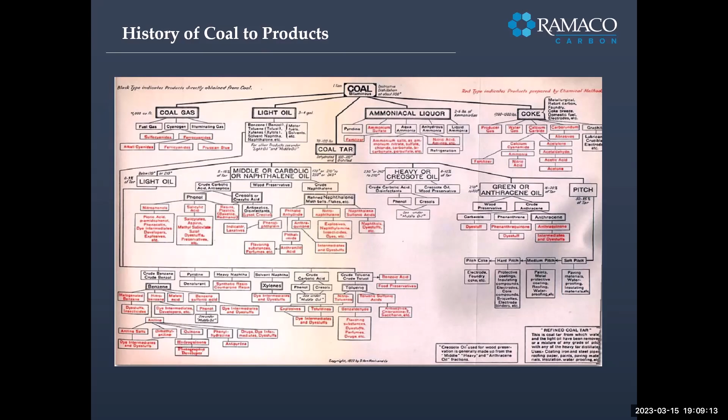The interesting thing about the different oils and gases and diesels is Sasol in South Africa basically did this for 50 years. They were going to build a plant in the southern part of the US. I don't think that ever got built. And this is the way in World War II that Nazi Germany was able to survive without having a whole lot of petroleum. They used the two different methods to generate aviation gas, motor gas, diesel and lubricants.

So our product areas are carbon fiber, bulk graphene, porous carbons, building products, monolayer graphene, and rare earth elements. Carbon fiber, of course, the whole goal here with carbon fiber is to make a lower cost, better product than what you can get from oil. So a lot of these products will come from oil. Plastics come from oil. You can make plastics from coal.

So the PAN fiber from oil is about $10 a pound. Is that still right, Bob? Is that $10 a pound now? So we're trying to shoot for a $5 a pound product. We're trying to make it a structural composite, so we can build things like car shells, hoods for cars, aircraft material, and then there's some applications in infrastructure like repairing bridges and making items for bridges to make them better.

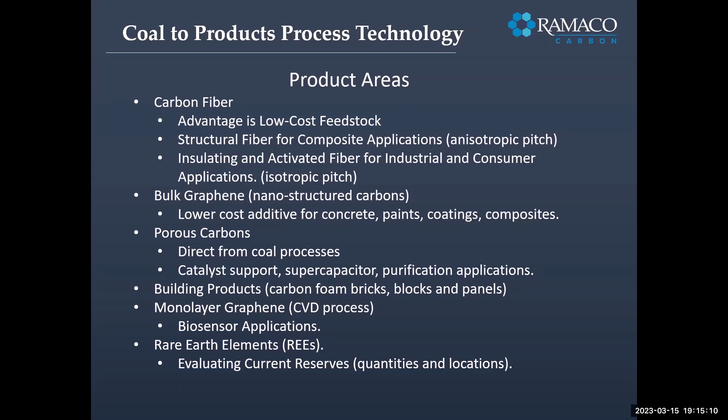So like I've been talking about, we want to take raw coal, very inexpensive, 3 cents a kilogram. A kilogram is about 2.2 pounds. Make it into metallurgical coal, so we increase the value of it by about 5-fold. Here with coke to make steel, we've increased it by about 8-fold.

Coal tar, we're going up in price, and so from the coal tar, now we make pitches, and that price increases even more. And then we go to mesophasic pitch, so high graphitic quality, a mesophasic pitch, and by graphitic quality, I mean the graphene occurs in it. We have ways of measuring the graphene and visualizing it.

And the textile process to go from the coal pitch or the coal tar to the carbon fiber, you'd basically melt this and make a thread. But once you get that thread made, then you treat it, so you have to oxygenate it and carbonize it to make it hard, so you can actually use it.

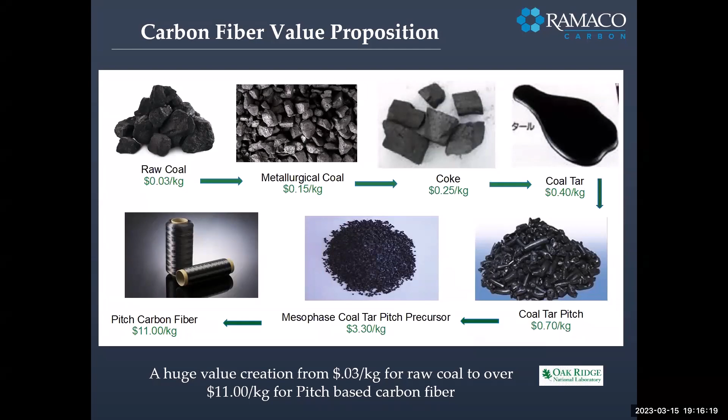This textile process is as old as textiles itself. If you've ever been to Buffalo woolen mills and seen their process, it's a very similar process once you get it onto the spindles. So here we are with coal to carbon fiber. Currently, we've just finished up these 2 grants right here.

We have sourced the material from a company called HTI Axens, and basically we were looking at ways of increasing the graphitic material in it. And if I remember correctly, this is a microscope image of it, and the purple material is the graphitic material. And so Chaz looks at that, then estimates the percentage.

And so he's trying to get a higher and higher percentage. I think the highest he was able to get was about 20%. So it's really best used for the melt blown material, the electrospin material that we use. It's not going to be a high quality carbon fiber material, but we've sent some of our other coal from back east over to HTI Axens to generate us some more pitch. And Chaz has a process of looking at that and attempting to make more higher graphitic material for mesophasic pitch.

We have this device here called a Randcastle. They put the mesophasic pitch in here as a solid. It basically melts it, extrudes it, and we put it onto this roll here. So this is different runs of the pitch that Chaz has extruded and spun onto this.

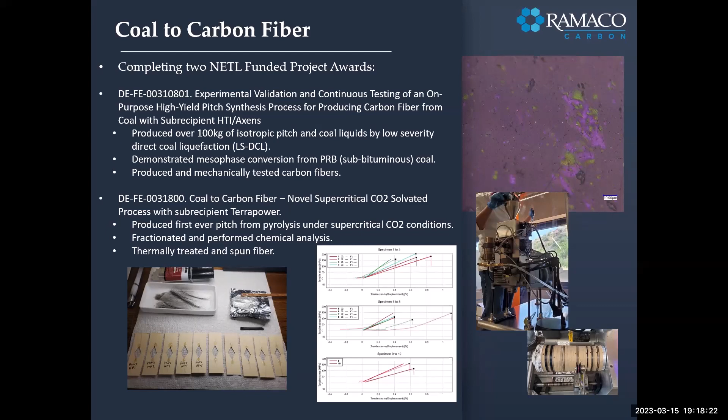And then he mounts it onto these little devices here. So in the middle you have a fiber. And then he stretches it and looks for changes in strength. And that's what these graphs are all about. So again, structural fibers, here's his machine for determining the structural strength of it.

And so again, the structural fibers: automotive applications, wind power, aircraft, infrastructure, marine, and sporting goods. And so his view on the blades of the wind turbines is to actually use it here in what they call a spar cap. This is your piece of metal here, and this is the spar cap to reinforce that. Because carbon fiber is lighter and stronger than steel, lighter and stronger than aluminum, and more conductive than copper.

So activated carbon filters, we talked about a little bit, air and water filters, industrial processing filters like capturing organic volatiles that come off a process, say a gluing process or some other process like that. CO2 capture, we're looking at how we can use this to capture ambient CO2 and do carbon capture.

Insulating fiber, industrial furnace. He's also said that this could be used for the nozzles on spacecraft and missiles and things like that, because your nozzle needs to move to change the direction of the missile or the rocket. And then we've talked a little bit about the building insulation here, and here's specialty aerospace.

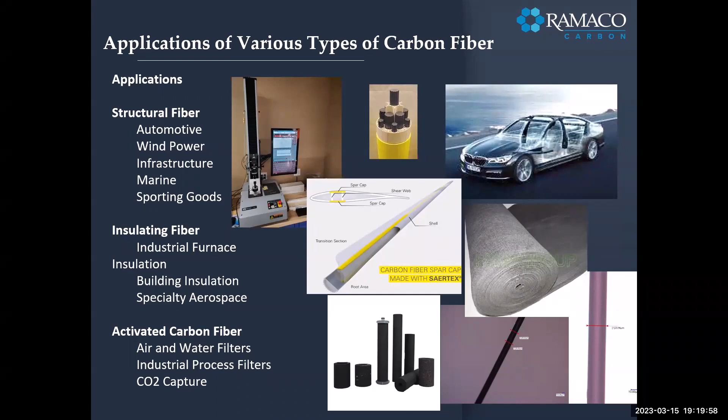The porous carbons. So we're basically taking coal and treating it and then baking it and washing it and then testing it to see how much porosity we get in it. So depending on the application, we want big cavities and a lot of them versus small cavities and a few of them.

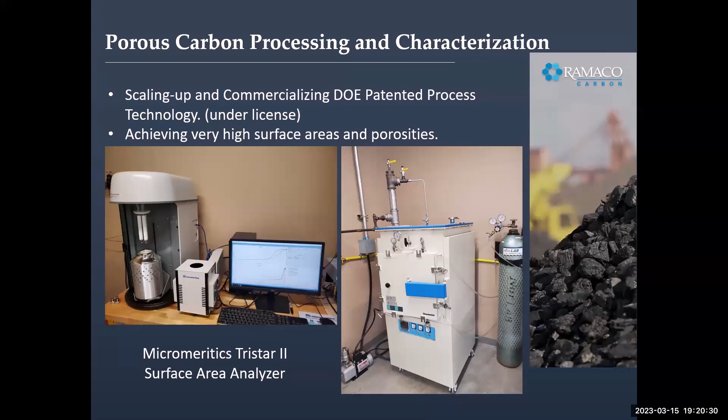And this would be used for things like catalytic support. Bob worked for a company that made catalytic converters, so it'd be like the catalytic support for that. We can do electrical capacitors. Here again, we're talking about adsorption and desorption of things like CO2 or other materials as a purification for water, because it's basically an activated carbon. Almost all water plants that I know of have activated carbon filters in them that they move around and change out.

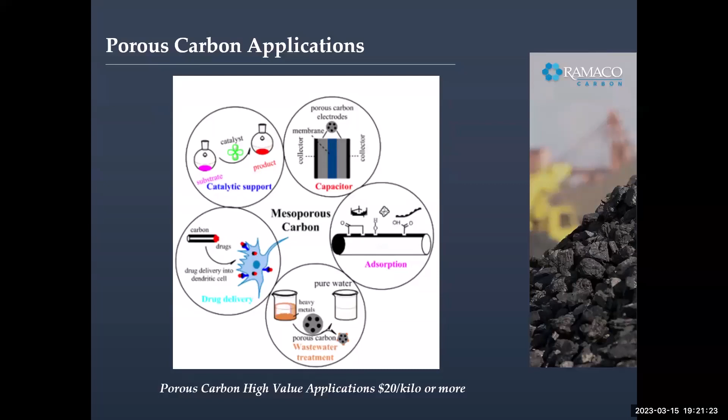And drug delivery, there is actually a university that used this as a drug delivery to prevent the application of an antiviral to an infected eye every day. So, okay, this is what we refer to as graphene A, nanostructured carbons. This is for applications into concrete and paints and inks and other coatings.

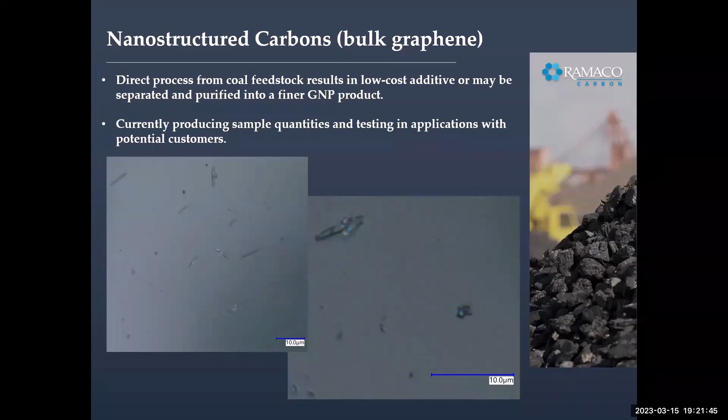So here we are. Okay, good. Now I'm back on track. Is there a question? I hear a question or just a comment?

So here we are, monolayer graphene. Like I said, we're taking raw coal, and of course, raw coal is more complex than just a lump of coal. As you go from the lower ranks of coal to the higher ranks of coal, so from peat moss all the way up to anthracite and graphite, and I think diamonds have now been added to the rank of coal, you see an increase in order and a decrease in dirt and other things in it. So sub-bituminous coal is about halfway between that. So you get graphene-like material in there with other dirt and other amorphous material.

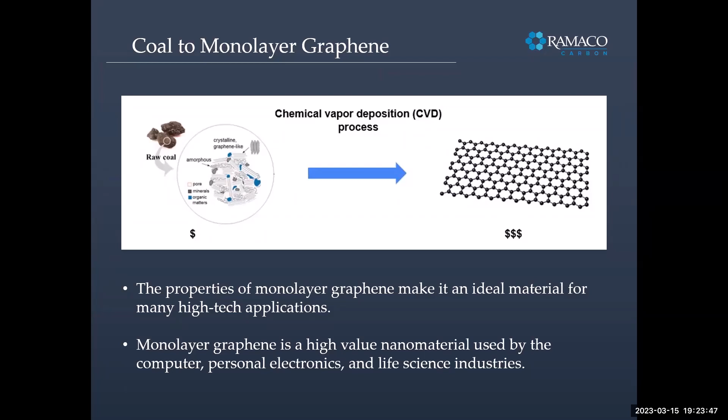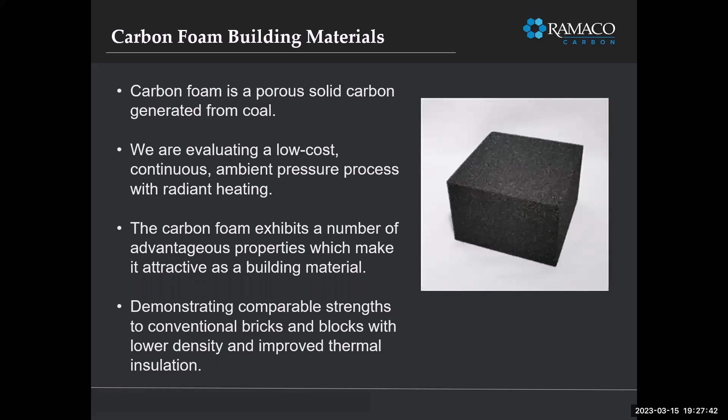Now we're on to carbon foam. Chris can generate these in a block shape. You can generate them in a cup, so they look sort of like a dome, like an igloo. It's a matter of the form you put it in. It's low cost. It's pretty inexpensive to make. Like I said before, you can lathe it and cut it and do things like that with it. And then you can glue it together and use it like a brick. Ours is from coal. UW made a house of carbon bricks made from char last year.

So here's sort of the economics of it and the driving force behind it. It's lightweight. It has a high compressive strength. It's an insulator. It's also fire resistant, corrosion resistant, electrically conductive. So the carbon foam, its density is 12 to 30 pounds per cubic foot. You've got brick at 100, 120, and concrete at 150. So carbon foam is at least 10%, only 10% of what concrete is.

Your strength, of course, 3,800 pounds per square inch. That compares very nicely with concrete down here. Then this is high strength concrete down here, so the stuff that goes into bridges, highways, pillars, the weight sink on buildings.

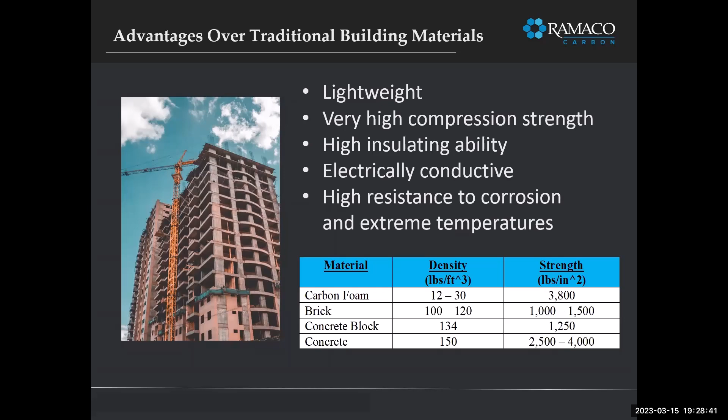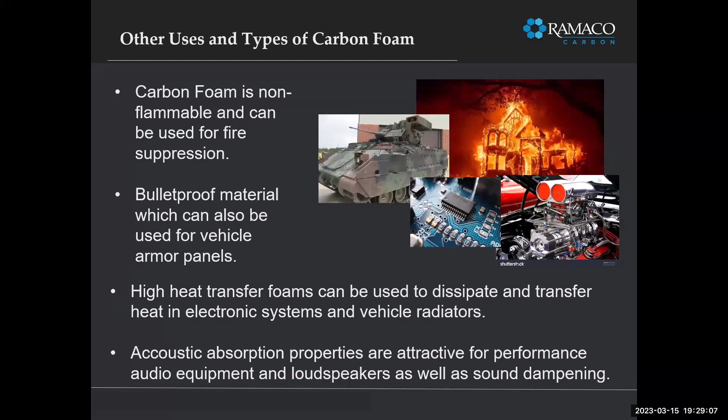You can also use it for, like I said, it's fireproof. It's bulletproof, so it can be used as armored panels or even for armored personnel. You can put it into a plate. It's great for heat transfer. The heat transfer thing's pretty crazy. You can put something hot on one side and it feels cool on the other. And it actually has sound dampening qualities too. So it's sort of an uber material.

So our commercialization plan for any of these is to find and make these as cost effectively as possible. In fact, it's a recurring theme in our commercialization meeting, which is tomorrow afternoon. What does that do for our cost? What does that do for our margin? How do we deal with the different costs in doing things? Is that too expensive to do? In the case of the REEs, how much are we going to get out using these different refinement techniques? Because refining something's never 100%.

And then that helps. And then the cost of doing business and the technical risk, the economic risks are all compiled to decide the economic plan for it. Is RAMACO itself going to move forward with it? Is there another way to make money with it? Do we partner with somebody? And that's it. So, questions?

Sure. So these experiments are being done with coal. Is any of that coal down where that IC building is being used? Yeah, so the actual mines on the other side of the highway? Well, I guess I'm not sure. What coal is being used? Is it all within this area that you get that coal from, or do you have to bring it in from somewhere?